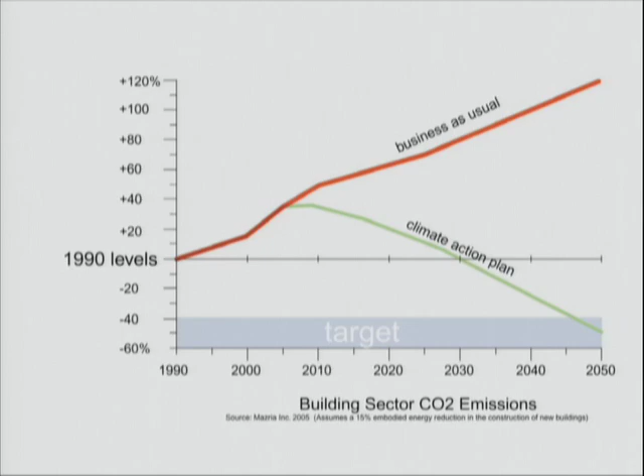So, the good news again: buildings actually use a lot of energy. Even when you account for materials and so forth, it can be up to 50% or more energy than the other sectors—transportation, industry, and so forth. And what this means is there's a big opportunity for us. Buildings are also the solution to a lot of this problem. As the people in the building industry here, we have that opportunity to really engage in that.

So the way that we would suggest you doing this is through the creative aspects of design. We have to look at what is handed to us climatically and as other patterns, and how can we actually engage buildings to do that? Look at what's going on around us—what are our solar resources, our wind resources, the different bioclimatic design things? Use those as ways of thinking about design, and then integrate it so that we can reduce our overall environmental footprint.

That's what we're here to show you today: a bunch of small tools that can help you do that. We believe these are things that happen early in the design process, to the degree that we can start out right up front getting a good orientation for your building, getting good shading, understanding the carbon implications, doing good daylighting—all of those big ticket items, we can go ahead and actually make them less of a problem. We can basically reduce the scope of the issue and get to where we want to get to.

So Vikram will talk about Chaya, which is a shading tool. Josh will talk about daylighting. I'll talk about Greenfoot, which is an ecological footprint tool. And Peter will talk about the design, the energy design plugin as well.

What we need to do is drive that down. If we get to this first box, that's kind of typical code, 90.1-1999, that's about 53 kBTU per square foot. If we go further, we get to the CBECS average, and that's the 50% goal we need to get to now. So that's where you should start today.

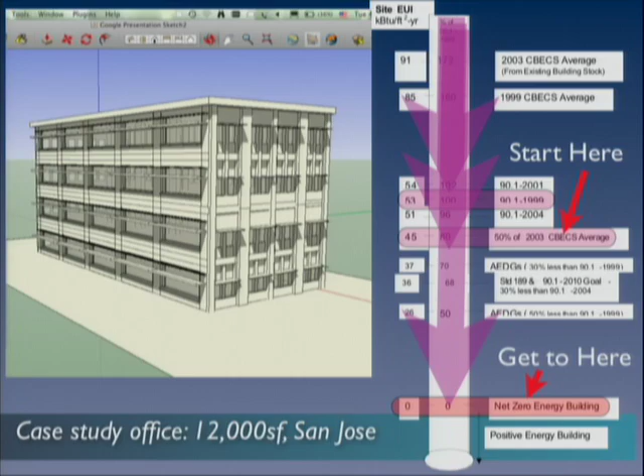But what we really want to do is drive it down even further, if we can, to get to these net zero carbon buildings, or maybe even further into energy positive buildings. There are certainly many examples of buildings that have been done today that either totally reduce their carbon footprint or actually produce more energy than they consume. Those of you who are architects with the AIA have perhaps looked at the top 10 green buildings done every year, and several have produced more energy than they consume.

This is not, again, rocket science. I'd rather be doing that than trying to get my kids off to school in the morning.

So there's a pretty easy way to go about this. Again, we're not trying to diminish the significance of this, because otherwise everybody would be doing it already. But the straightaway way to do it is to reduce the scope of the problem, basically through design. And that's where SketchUp comes in, because we can make design iterations early and understand things like daylighting, efficient mechanical systems, efficient fixtures, and issues relating to orientation and insulation, to basically reduce how much energy your building is going to need.

You need to do an appropriate analysis to see what specific issues might be most important for your building. Sometimes it's lighting, sometimes it's ventilation. Different buildings in different locations have different energy use patterns. But basically, just through design, we feel you can usually get to that 50% mark pretty quickly.

The second place to go is to add renewable energy technologies, different kinds of low-carbon sources of energy, PV, as we have here, solar hot water, et cetera. These are different ways of providing energy to make up and displace all that energy currently being generated by coal-burning power plants and so forth.

We see that this is done cost-effectively. Usually we can reduce capital costs right up front by just designing the building well to begin with.

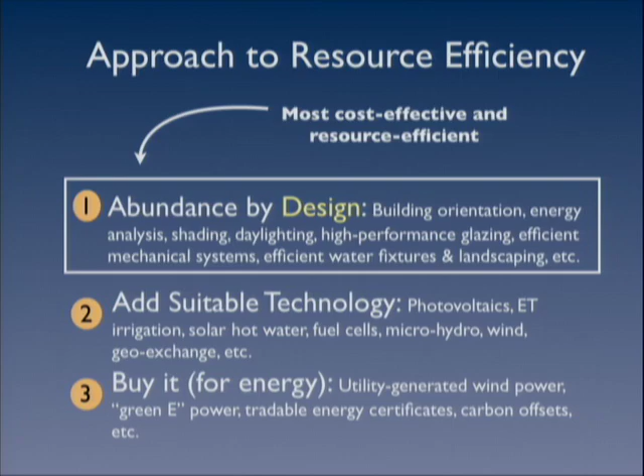So with that, I'll turn it over to Vikram, who will talk a little bit about this tool.

Okay, I'll just speak from here. So Chaya is the name of the tool, for those of you wondering why I chose this random name. It's actually derived from Indian mythology. Chaya was the mistress of the sun, the goddess of shadow, and this started off as a shading tool, so that's where it comes from.

The premise is that generally the way we interact as architects with engineers is linear. We design a building, hand it over to them, they design the systems, and by the time it comes back, all the good decisions have already been made. So the idea is to get in early and have meaningful conversations back and forth.

And the question is normally one of efficiency: how many SEERs can I get out of my system? The real question we should be asking is, how often can I shut my systems off? Can I make my buildings drive less, for instance? Design teams are generally very passive about the passive approach. They really don't want to design a building that operates without systems, because God forbid we can't turn the thermostat up or down by 1 degree.

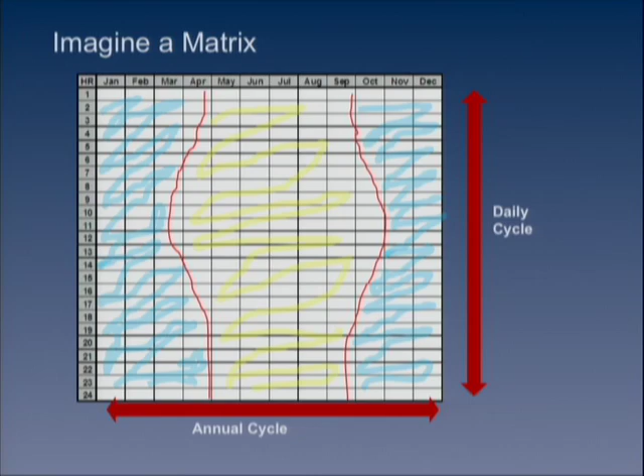So the question is, how do you define the overheated period? The factors that affect the building thermodynamics are radiation, plug loads, lights, people, all of that stuff.

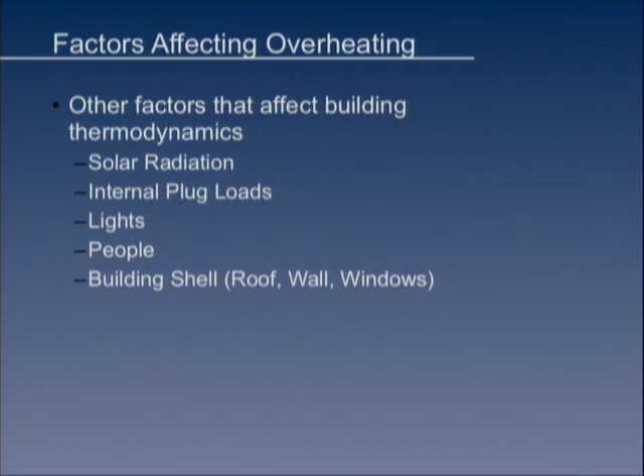Balance point temperature kind of represents all of these factors together. For those of you who are not familiar with these aspects, I apologize, we don't have time, but there is a paper on my website that you can download that explains these factors.

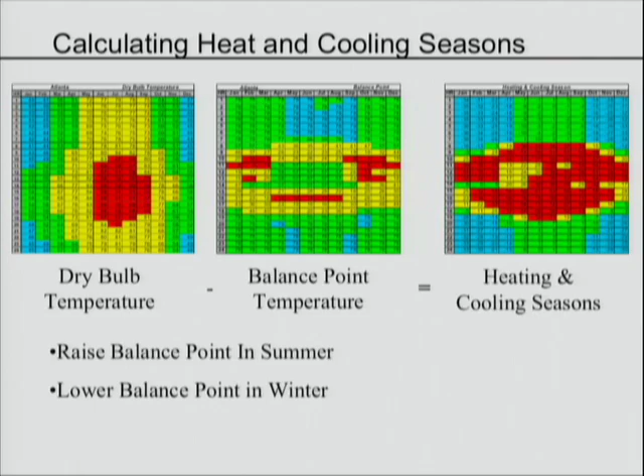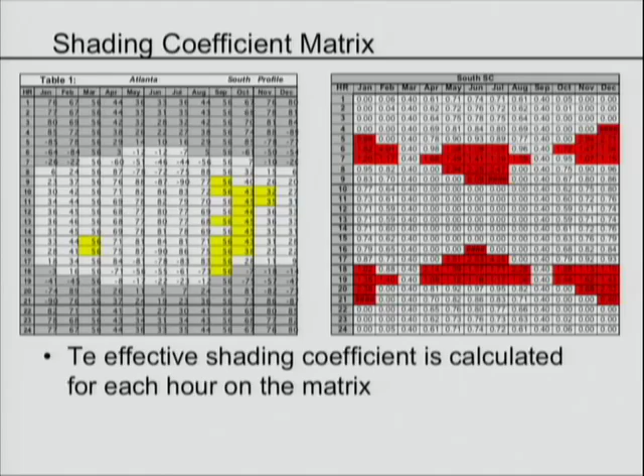This actually comes up with a shading coefficient matrix as well that calculates your shades. What I'll do right now is go over to the demonstration. Right now it's Microsoft Excel based, and I'm hoping one of you Ruby scripters wants to collaborate with us, because it would be really cool to have it in Ruby script.

Essentially what this does is you've got these sections of your west window, south window, and stuff like that. You can see over here it's starting to overheat in this period of the year, kind of towards the afternoon, towards the late end of the day. So you can see the minute I start to add window shades, how that period disappears.

This gives you instantaneous feedback. It's actually calculating real time what your building is doing, what those shades do. This graph over here actually calculates tonnage on your HVAC equipment from your windows, so you can see real time what adding shades does to your HVAC loads as well.

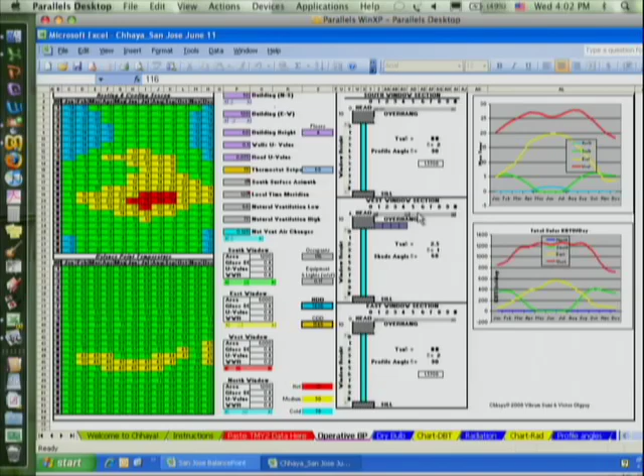The other thing it allows you to do is, right now this is based in San Jose, so it's relatively mild. But right now the building is elongated facing east and west. So if I rotate the building, it gives you the difference - by a simple rotation, you actually move that red period towards the winter months, and you can track real time what's happening.

The other thing it allows you to do is change your window sizes and stuff like that. I probably have to sign off now, but essentially you can download this on the website - at the end we give the web address - and play around with it. I'd love to get feedback. Thanks.

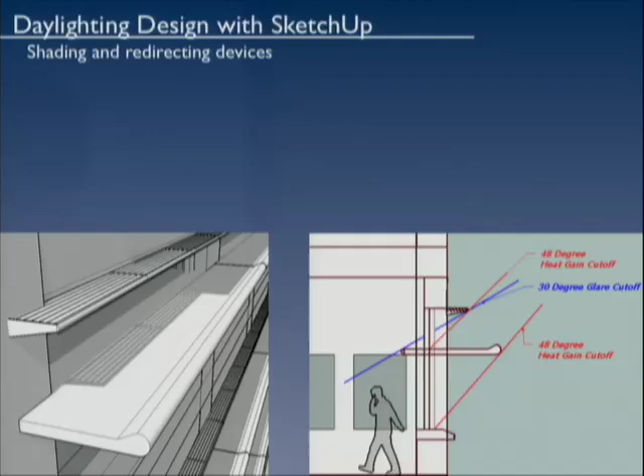So to go a little bit further into why have good daylighting: first off, it prevents glare for occupants inside the space. It reduces heat gain, reduces the cooling load, and reduces the time needed for electrical lights. So you can have really nice lighting in the space, and with daylighting you have light that fluctuates, so it's actually more comfortable for occupants, and they can see their work a little bit better.

This is that building that Victor had shown earlier, that typical commercial building oriented correctly east and west. This would be like a pretty typical overhang that has both a glare cutoff angle and a heat gain cutoff angle, and the Chhaya is outputting the heat gain cutoff angle.

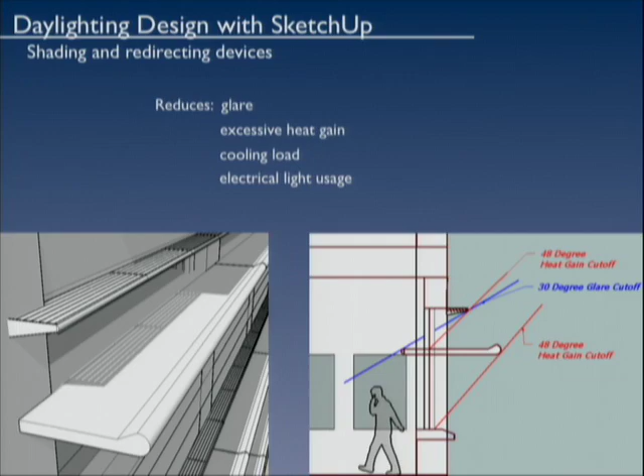What SketchUp is awesome about is that it really helps us understand where there are glare issues and how often glare is going to come into the building, so you can size interior light shelves and other things to prevent glare.

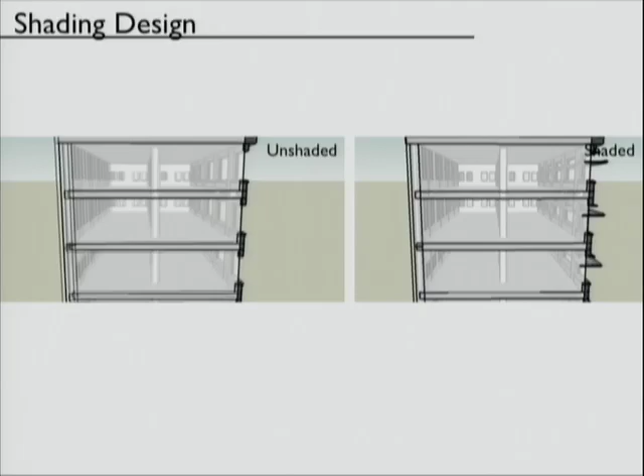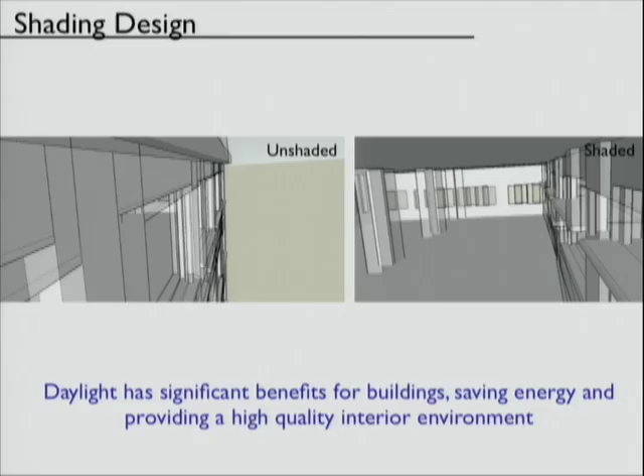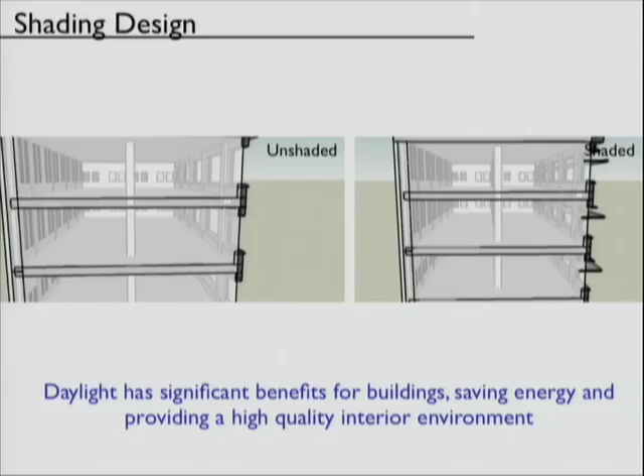So there's the base case on the left and the shaded one on the right. In a bit it will show that without shading, there's going to be glare throughout the day from the east and the south. With the proper shading on the right side, there's less glare from the east, and now the sun is just hitting the exterior light shelf and also the interior light shelf to start bouncing the light. But SketchUp doesn't do a very good job of showing that extra bounce and how the space is actually going to feel.

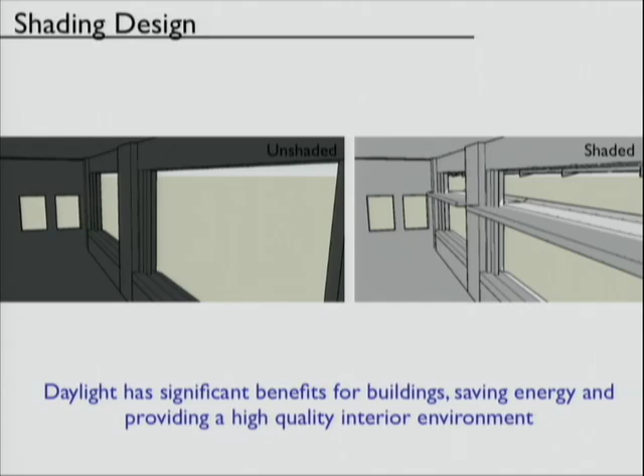So this is when we start to go deeper into AGI 32, which is a 3D modeling tool that we can import SketchUp models directly into. We take a simple SketchUp model, and usually we'll just deal with one floor, and it can give us quick renderings of what the light is actually doing to the space.

In this case, now that we have good lighting, you can see that there's balanced light levels. The light is starting to bounce off of the light shelves onto the ceiling, so you can start to understand where there might be dark spots and other things happening within the space.

Then we can take that model and get some outputs from AGI 32 and see what's going on, and see whether the light is actually satisfactory.

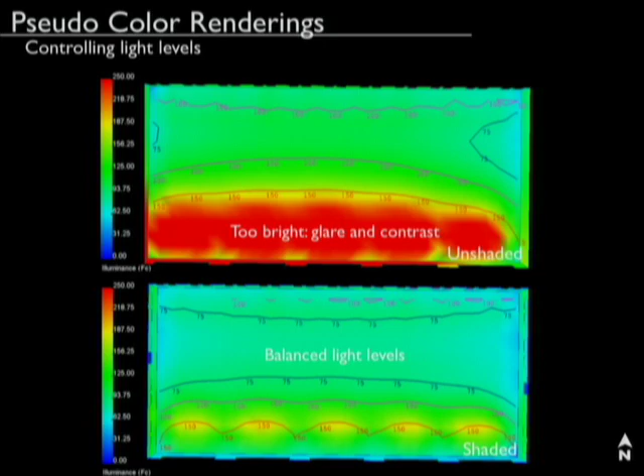It graphs it in a sort of false color rendering, so you can see foot candle levels and contrast. On the top one, where it's unshaded, we have these bright spots, and once you actually go in and see the rendering, you'll understand that it feels really dark even though you have lots of light. On the bottom, it's much more even, balanced light levels, and you can actually have lower light levels but it feels comfortable.

After we understand the light levels, now we know there's enough light in the space. So we want to go a step further and ask, what will this do? Why is this beneficial? Well, we want to end up trying to turn off the lights as much as possible. It'll save us money, there's pollution avoided, and energy reduction.

So what we can do is plug it into this tool called Spot. You can do a generic layout of the electrical lighting fixtures, and it will determine how often these lights will be turned on throughout the year. It really looks at how much daylight is getting into the building, and says the middle spaces' fixtures are going to be on maybe 50% of the time, and the ones in the front are not going to be on when there is daylight availability.

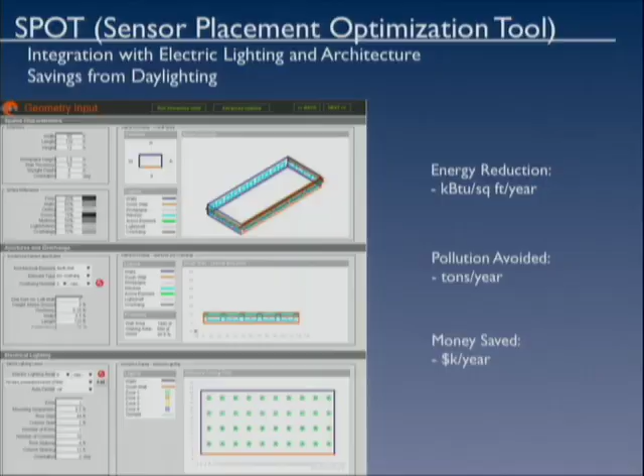What this does is give us an output of each day and how often the lights are turned on in that space. So for a space that's really well shaded with thin floor plates so we can get bilateral illumination, you can see that it's really taking advantage of all the daylit hours, and the lights are only on about 11% of the time.

And what it does is you can plug in this program when the occupants are going to be occupying the space, so it's probably like 15% because there are hours of the day when the lights have to be on when there's not daylight.

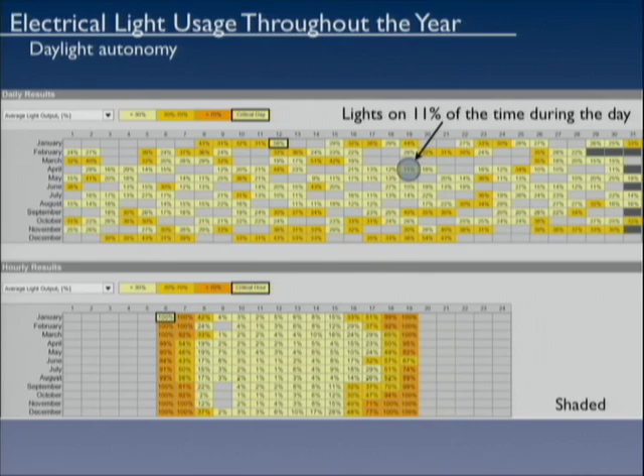In conclusion, I just wanted to reiterate that we're trying to get to the point where we can really show how we can actually start to turn off the electric lights and reduce the cooling load, and really understand the heat gain implications of the building. All three of these tools can really be integrated, and SketchUp is a really important aspect of daylight design.

Josh ends up doing a lot of our daylight modeling at RMI, so he knows these things inside out. We're going to talk about one last small program, a spreadsheet which we produced, called Green Footstep.

This is a tool to basically do environmental footprinting of your building. So we can measure different metrics, water use, et cetera, and see how your building kind of adds up. For those of you who aren't familiar with the concept of an ecological footprint, it basically says that we have lots of different end uses for different kinds of needs.

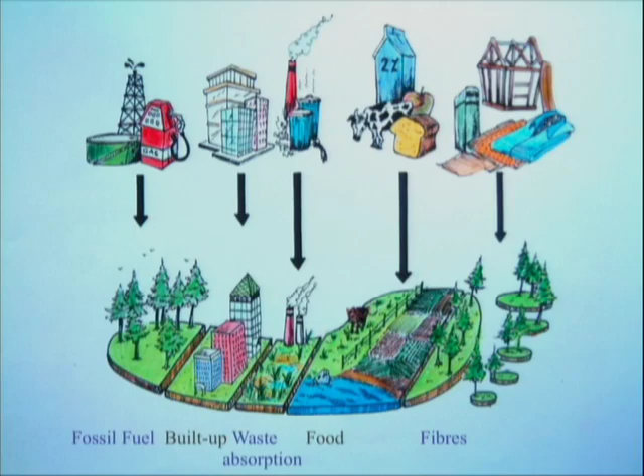What we've done is taken that and adapted it to buildings, where we look at the main building impacts, water and energy and CO2 and so forth, and associate that with the productivity of land, water, and ability to assimilate. We've put this into a simple little spreadsheet. So let me give you a quick demo of that.

Let's see. And this, of course, will crash as well. Okay.

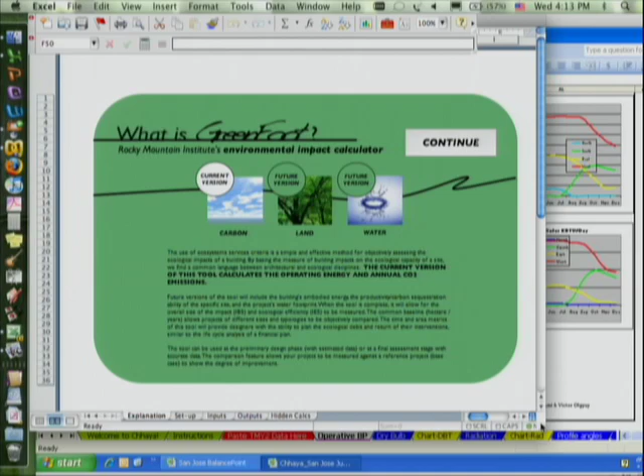So we have a couple versions of this, but this is again a very simple set of spreadsheets that show, in this case, the CO2 impacts. When you take this, you can click through it and say, has your building's energy use been modeled? Or you can use the CBECS data I referred to earlier, kind of standard Energy Star type building data. So you can either enter that or use CBECS data.

Does the building have on-site energy production? Do you have wind power or PV or something else? You can put that in, or choose there. And the same for where your electricity is coming from. You can put in your own blend if you know where all your electricity is coming from, or you can plug in your state, and it'll use an average blend for that state.

So here you put in the basic size of the building, and in this case, since it's the CBECS data set, you could say you're using an outpatient facility or, in this case, an office building. Different kinds of uses in the building would be there, and you plug in what you think your savings might be, 50% or whatever you'd like it to be.

If you model the building, you'd plug in that data. Or if it's a goal, if you decide my goal is to make it 50% better, you'd plug that in. So you can either use a different energy model, get the data through something else, or use it as a goal-setting device.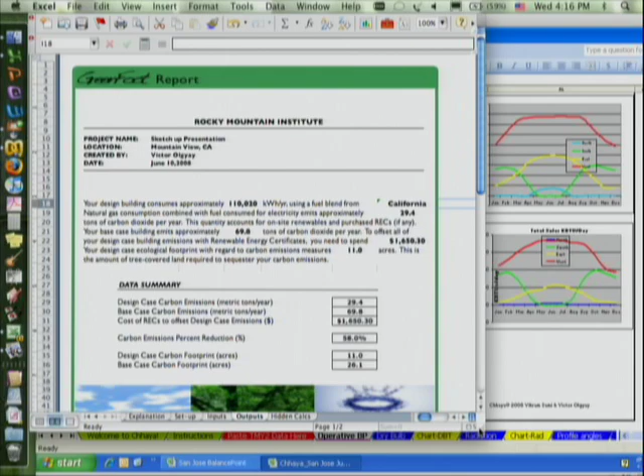Or you could turn it into how much you would need to spend on renewable energy certificates or some kind of offsets if you'd rather do something like that. So that's kind of what it does. It's a real quick, simple spreadsheet that gives you an idea of how much impact your building is having on the environment. We also have an expanded version that goes into water in great detail and energy production as well as other things.

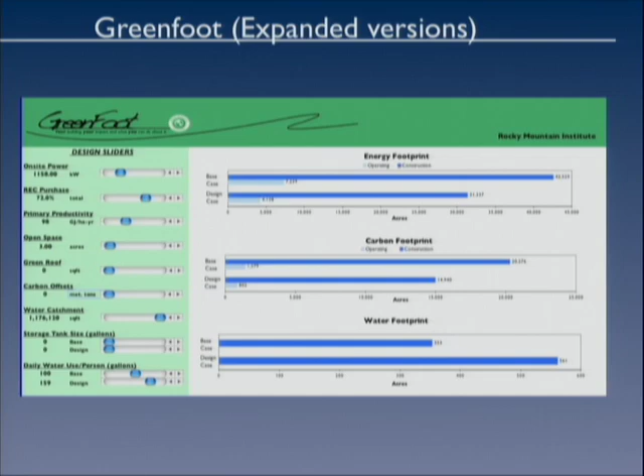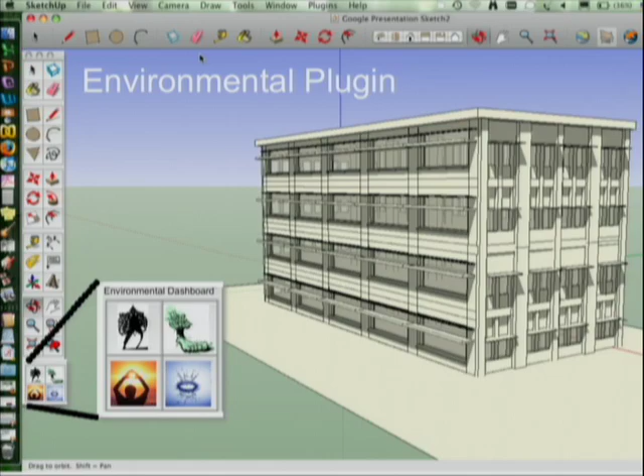Just one more thing about that: we put it together with these different design sliders. So again, like the tool Vikram showed with these little slider bars, a lot of this is that push-pull SketchUp idea of iteration. It should be a dashboard you can jump right into and use at a preliminary design stage to say, we think this is a good way of working. This is where we're hoping to go with this, to produce some plugins that have the Greenfoot, lighting, water, or the Chaya shading analysis as part of that, so we can more seamlessly integrate this with the iterative design process, which is such a great part of SketchUp and why we think it's so powerful to get this stuff done early.

So a lot of these things are available as mentioned. There's a website up for Chaya and for Greenfoot, and Spot is also available for free. AGI does cost money, but that's available too and a pretty powerful tool.

In conclusion, this is really an opportunity. For those of us in the design professions, we have a responsibility to get engaged in this, and I'd encourage all of you to make carbon reduction goals serious goals for your company. We've recently adopted the 2030 protocol to say that we're not going to design any buildings or work with clients that don't step up to the plate and say 50% carbon reduction is the base. We can do better than that, but at least get to that point. Some buildings are easier than others—office buildings are easier than perhaps laboratory buildings—but make a stand and take responsibility for what we're doing. Not only does it increase the value of your project, it's great for the planet, it's going to be profitable for you, I guarantee it, and of course it's good for all of us in the larger social sphere. So get at that triple bottom line, go for it.

It's really, I think, the challenge of our lifetime. So thank you, and with that I'll turn it over to Peter.

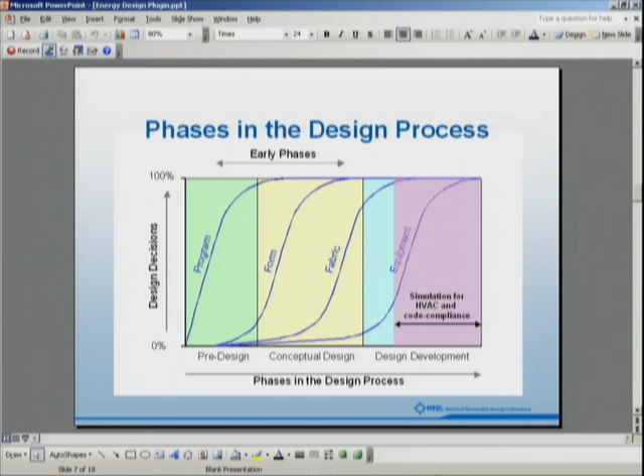So probably many of you know this better than me, but this is how SketchUp, or how I've heard SketchUp is used in the design process. It's often used by architects during the conceptual phase to quickly create a building form and massing, present that design concept to the client, and then maybe based on the client's feedback, iterate on that a couple times until they settle on a final design concept. And then from there, development moves into the CAD stages.

So what we'd like to see with the plugin is that you actually get simulation starting to happen here before the design ever gets to the client.

In version 1.0 of the plugin, which we're not at yet, right now we're at version 0.9.4, which is still a beta. Version 1.0, our main goal is really to make entering the geometry for EnergyPlus easy, which traditionally, in the past, has been pretty difficult with EnergyPlus.

We also will have this ability to automatically create prototype and compliance models based on what you've drawn in SketchUp. And that's going to be a very powerful feature.

It's using a web service that we have, which runs currently right now as the EnergyPlus example file generator. And you can get to that through energyplus.gov as well. It's just a couple of web forms which will automatically create a file for you and then email you the final file and email you the results of that simulation.

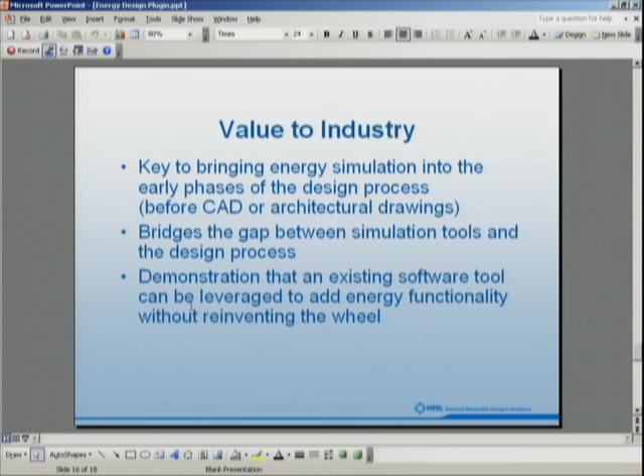It could bridge the gap between simulation tools and the design process, and it's also, for us, a good demonstration that you can leverage an existing software tool to add energy functionality without having to rewrite, reinvent the wheel, write our own 3D geometry interface. And SketchUp does a fantastic job of that for us already. So I think we can get on to the demo part.

Okay, here we are in SketchUp. What you might notice right away is that there's a few toolbars that the plugin adds, and all those toolbar buttons correspond to a special plugin menu. These are all the plugin commands that you get.

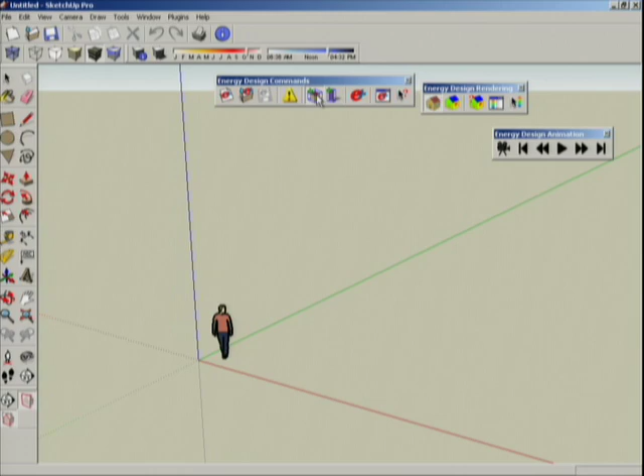So let's say I'm starting off creating a brand new model. I'm going to start just drawing a building. The first thing you need to do is create a zone. You click that, and what I've done is basically just created an empty group in SketchUp.

It's kind of neat to present to you, because usually when I'm presenting, I have to explain SketchUp and all the benefits of it. You guys already know that, so it's a great help for me.

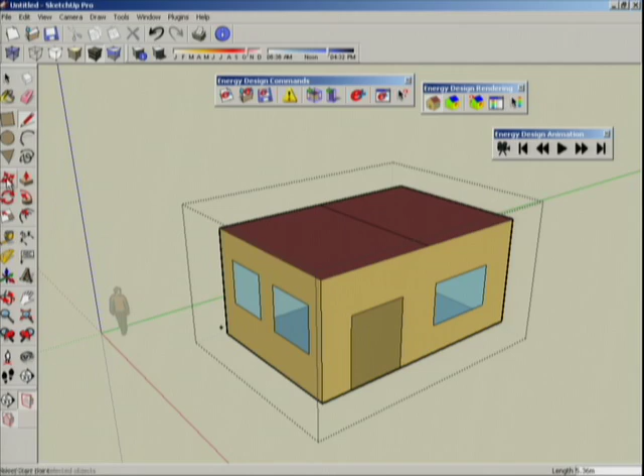So once we get inside the group and start drawing stuff, you'll see that things look a little different than you might be used to when you're usually working just straight with SketchUp. What's going on here is, as you're drawing in this group, the plugin is watching your every move and basically creating Energy Plus objects simultaneously as you're drawing. That's why you see things in different colors than you're used to. And I'm obviously showing off my amazing SketchUp skills.

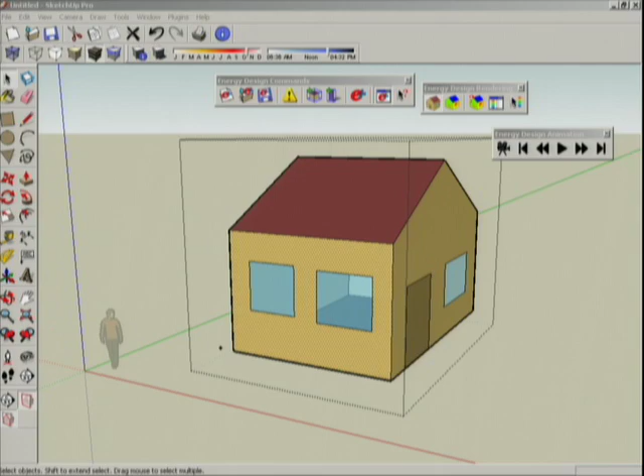So now, just to prove it to you that there's actually Energy Plus stuff behind what you see here, we can go in and start clicking on things and open up this handy guy. This is the object info window, which is going to show up on my other screen here, and I bring it in. I understand you don't want to really know what all this means, but basically each of these, in Energy Plus, it's kind of structured around objects.

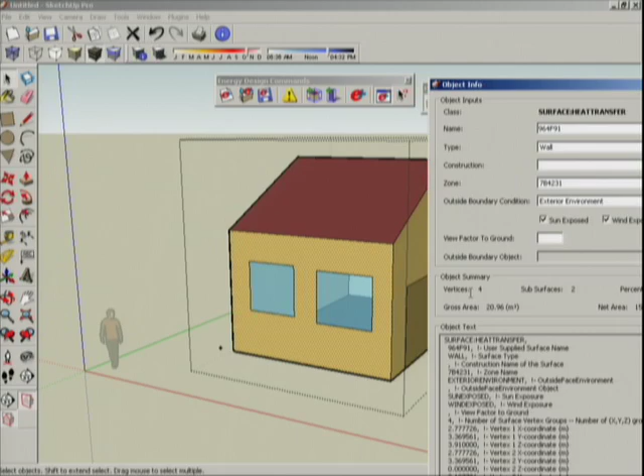So let's say a wall has its own object, a window has its own object. And what you're seeing here is the inputs that go into creating an object for Energy Plus. And this bit down here is the actual text that the plugin has written to the Energy Plus input file. This is the stuff that you used to have to do by hand to describe your building. Imagine putting in all these 3D coordinates manually. You get really good thinking in 3D, but it's a real pain.

So you can switch things, like change the boundary conditions, like say this one has no sun exposure, no wind exposure. You can select the construction. Let's see, it's a heavy exterior wall. And as you make those changes, it's dynamically updating all of the text down here. And you've got a nice little summary in this area of a few handy things to know.

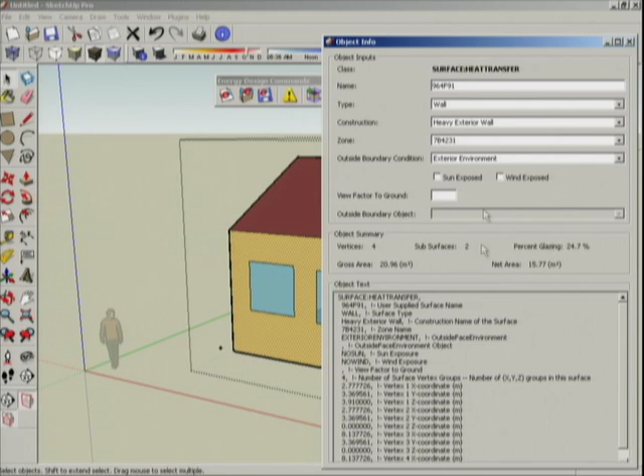So if we click on something else, let's say this window, it's got a slightly different set of inputs that Energy Plus requires, and you can set those here. You can pick things like the shading device, frame and divider. We'll just set the construction. Unfortunately, right now in the plugin, you'd have to have pre-configured your shading devices and frames and dividers and constructions beforehand. So the plugin doesn't handle that yet.

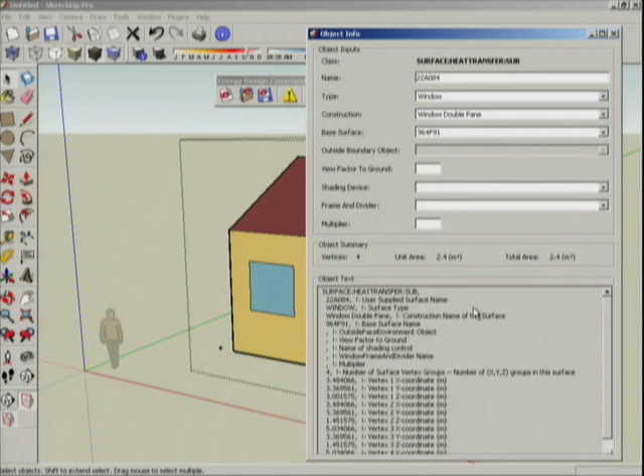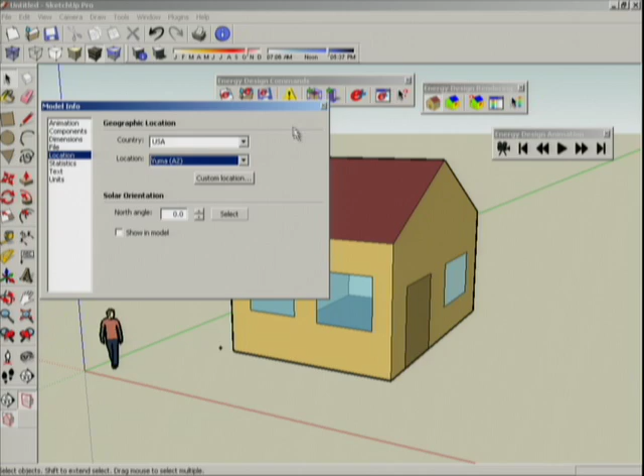Question: does it use SketchUp's location system? The answer is yes. It's synced with the simulation info. You see here, it's got the latitude, longitude, time zone, elevation. If you went in and changed that through model info, I'm not sure it's going to do it dynamically. If you change it here, then it updates. And it works two ways, so if you changed anything here, it's going to update the location. For other countries? Yeah, I think so. It's just doing latitude and longitude. The only thing it can't do right now is the elevation, because SketchUp just doesn't carry that information right now.

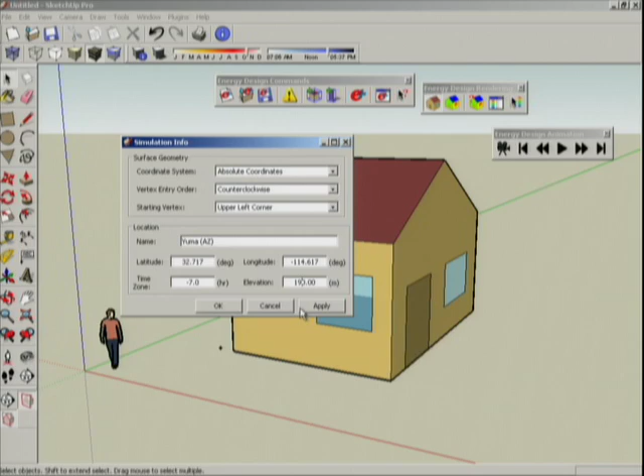Question: Do you model other buildings that are adjacent to it for some shading? Yeah, you can do that. So this was a zone group. To do shading, you'd create a shading group. And it's pretty similar.

It's got a different color. And now those are all created as shading surfaces.

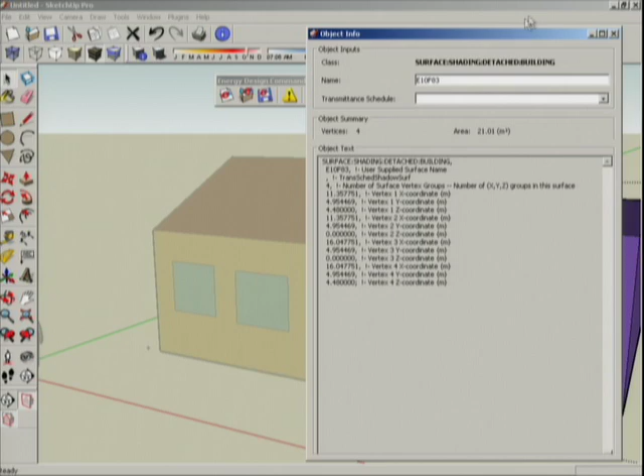If you're designing inside an existing cityscape that's already modeled in SketchUp, can you use that, or do you have to put all those buildings into the group for shading? What you would do is basically trace over them. You can have them in your SketchUp model, add a group, and it'll still snap to the same points, and you just trace over there. Typically you don't want all that extra detail, so this lets you simplify things.

Let me try to go on farther before we do too many questions here in the middle. Let's see, where was I? So one thing I want to point out is that I've gone to great lengths to make the plugin experience pretty much seamless with the rest of your SketchUp experience. You can just draw as you normally would without selecting too many special tools or doing anything out of the ordinary.

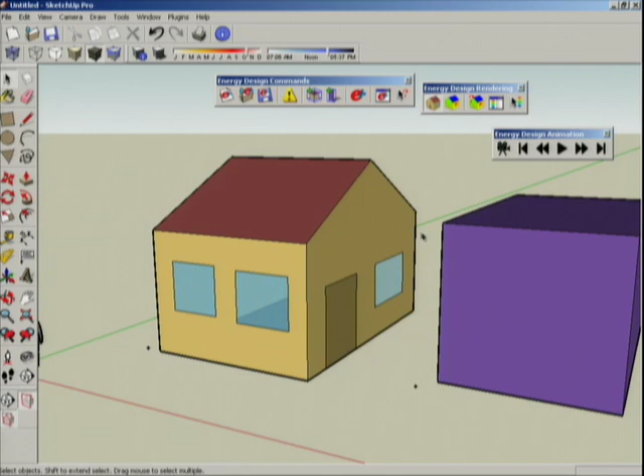Let me close this one. And I want to show you that it can also read in existing Energy Plus input files, and that'll show you some nicer geometry.

The plugin comes with its own examples. Let's see, what's a good one? You can't see it because it's drawing on my screen. So it's reading in the input file, parsing it. Depending how big your file is, it might take a little bit of time.

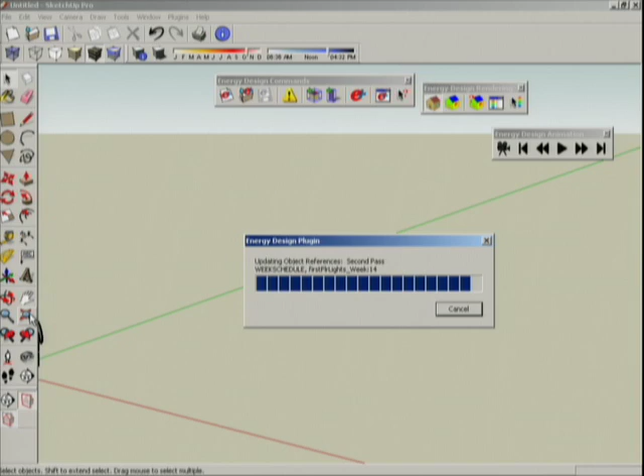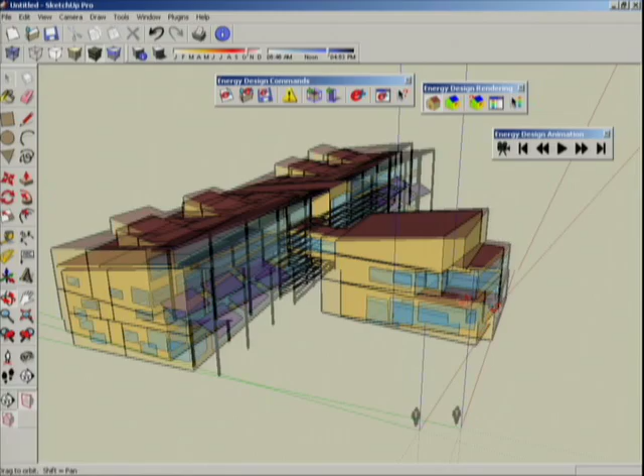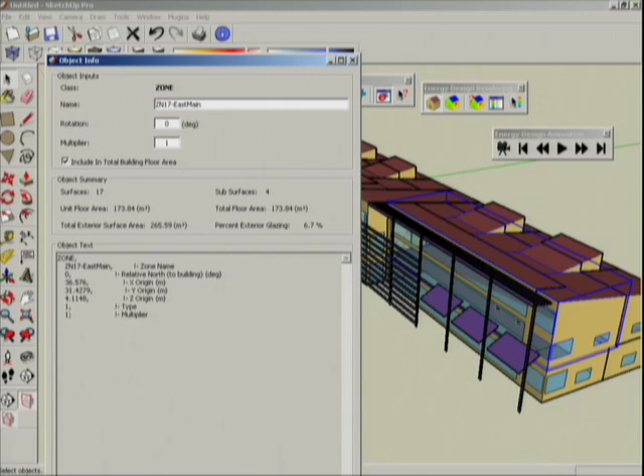Now it's drawing the full model. This was a building we studied, the Chesapeake Bay Foundation building in Maryland. It's got a lot of nice stuff - these are PV panels here, and it's got a lot of shading devices. Just like when I drew the other model, you can select these different objects and see, oh okay, this is that zone, this is that zone, go inside it, and look at the individual surfaces.

So let's close that. This is actually a model that we created using the Energy Plus example file generator. So this is an example of the type of thing you'll be able to automatically create using a set of wizard screens inside the plugin, and then using the web service to communicate to our server to create this file. So it's going to be pretty powerful.

Once you get that file downloaded, it will be basically a complete and fully runnable Energy Plus input file, and at least it's a good starting point a lot of times. So you might automatically create this model and then start playing with it in SketchUp, change the geometry - you could basically do whatever you wanted editing at this point.

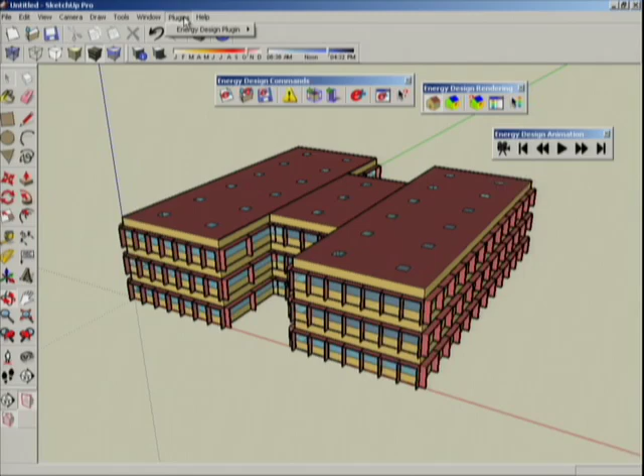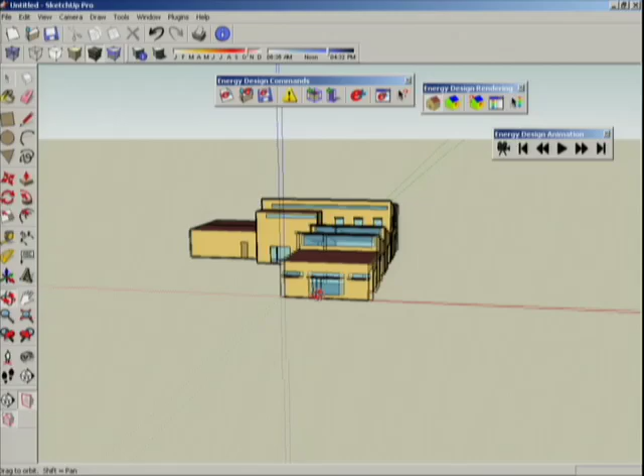Let's see, it's interesting - this one's got a little bug in it, but it's kind of more interesting geometry. This is a real project we're working on, I think that's in Greensburg. Is that... oops.

All right, this is just one of our really simple example files - kind of silly, but I just want to demonstrate how you can run Energy Plus inside SketchUp.

So this is the run dialog. You can browse to select a weather file - here's San Jose, gives you a bunch of information about that weather file. Let's not do an annual simulation, that can take a while - we'll just do a week. And select a couple things.

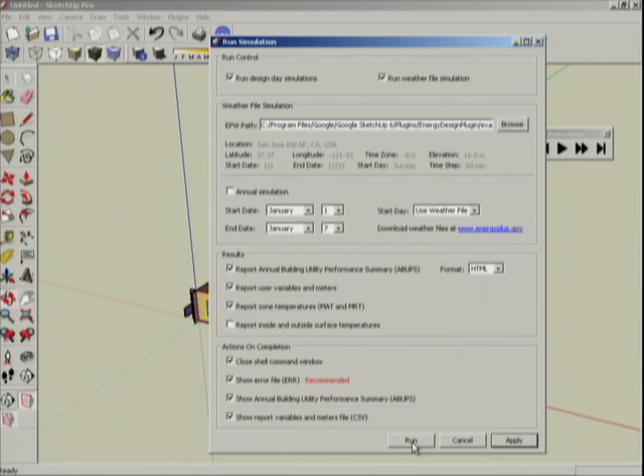These are just options for what kind of output it's going to show you and when it does the run. Now you get to see what Energy Plus actually looks like when it's running - pretty glamorous. And it pops up, here's the error file, so it completed successfully. That's good news.

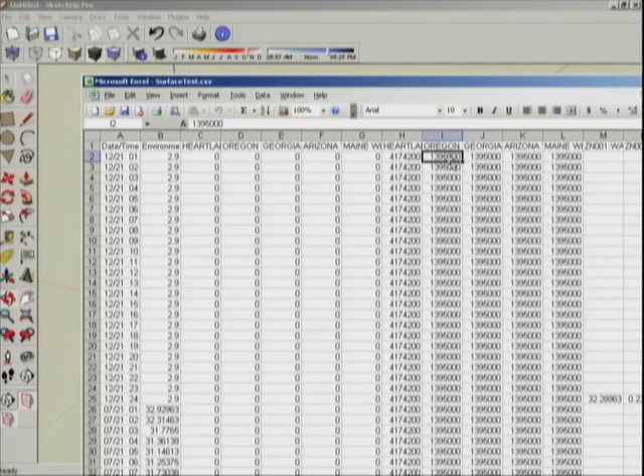Over here on my screen, we've got the Excel spreadsheet popped up. These are the results from that simulation it just did. I don't know what we're just reporting out - OK, here's electric lights, energy consumption. Those are just kind of unimportant variables that happen to be in the file at the time.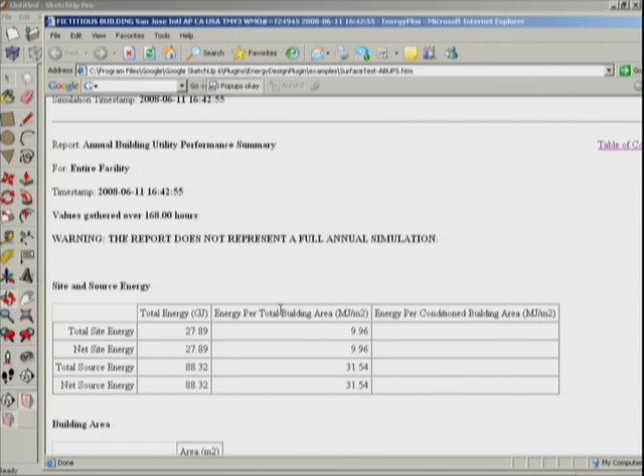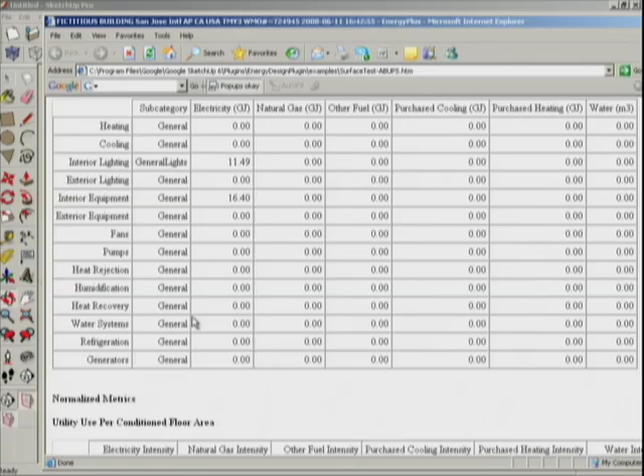You also get this HTML page called the Annual Building Utility Performance Summary, which gives you things like the total energy the building used over that run period, breakdown by end uses and fuel type, and a bunch of other stuff. So those are kind of the standard outputs you get from Energy Plus. Let me close this.

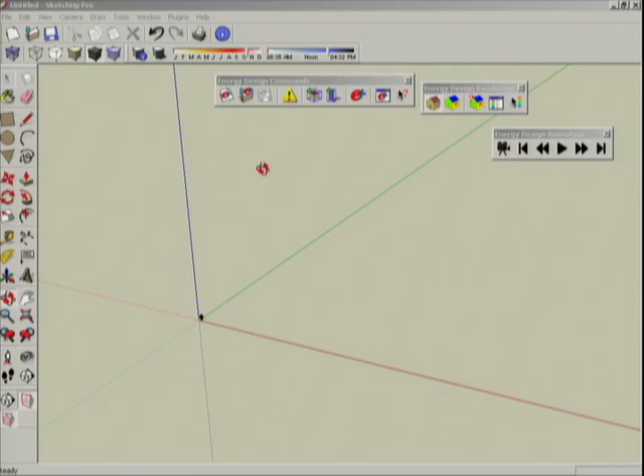All right, this is not a spaceship, it's a building. So one of the neat things you can do with this plugin is actually an undocumented feature right now.

What I've seen as one of the real strengths of SketchUp is the opportunity to do really powerful visualization.

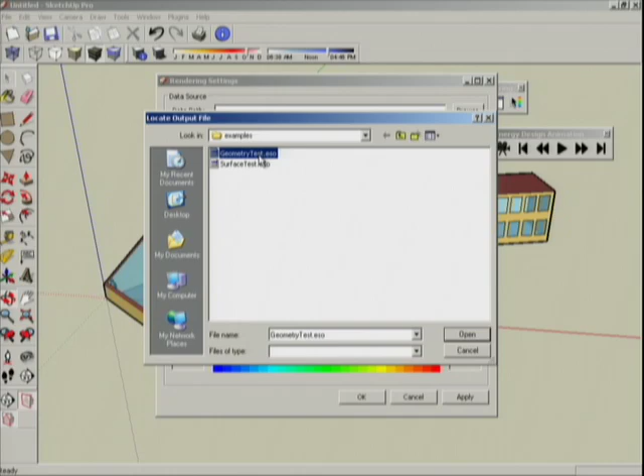After you've run one of these files, you can get the output data in raw form, that's the ESO file, so we just hit open. It takes a little while to parse because it's a big file and I haven't optimized it yet. This takes about a minute, usually the longest minute of my life when I'm presenting it.

The idea is that you read in the output data from what you've just simulated with Energy Plus, and you can map the output variables you've asked for to the surfaces of your model, getting a false color rendering of whatever data you want to see on your surfaces. In this case we're going to look at surface outside temperature, because that's a real intuitive, easy one to look at.

And that's for a single day? It can be for the entire year. It's a point in time, or it will explain itself in a second here.

Yeah, this is a really long minute. I think it must be more than a minute. I'm sorry, what? Is that something?

Yes, we're actually going to have our next release maybe by the end of June. We're hoping to push out these incremental releases every 2 months approximately, with bug fixes and so on, because it is still a beta.

Oh yeah, well, royal we. Yes, what is the schedule for the whole project? You gave me these different incremental stages. What's your goal? It's a little bit hard to say.

I'm a little cagey on it because it is going to be an open source project, so we have to see where the whole development goes, if a development community grows around it, and where they want to take it. In terms of DOE, we only have a certain amount of funding per year, mainly to have me do maintenance on it and maybe add a few small features and keep up with the latest changes in Energy Plus. So we'll have to see how that goes.

I think it's still live. Any other question I can answer? Well, Rudy? Yeah, who was way back there?

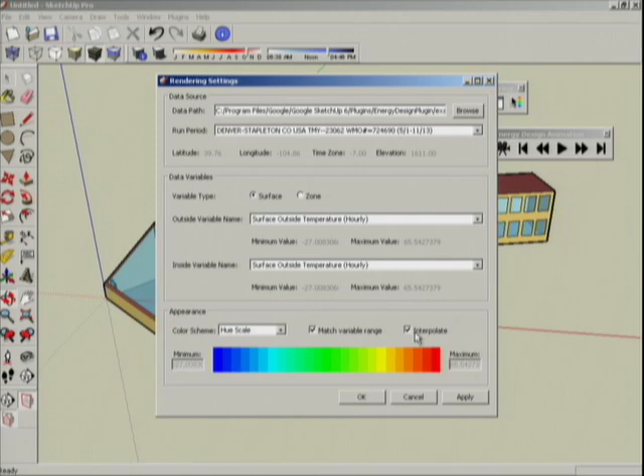So after a long time, it finally parsed that file, and these are the different run periods that happen to be in that file. We had 2 design days, and then 1 run period from May 1st to November 13th, so I'll pick that one. That's fine, turn that on, hit OK. Now the other thing I have to do is flip that switch.

Now you're seeing everything with - let me get a little temperature bar here. It's in Celsius right now, so I know that's not that helpful, but that'll change.

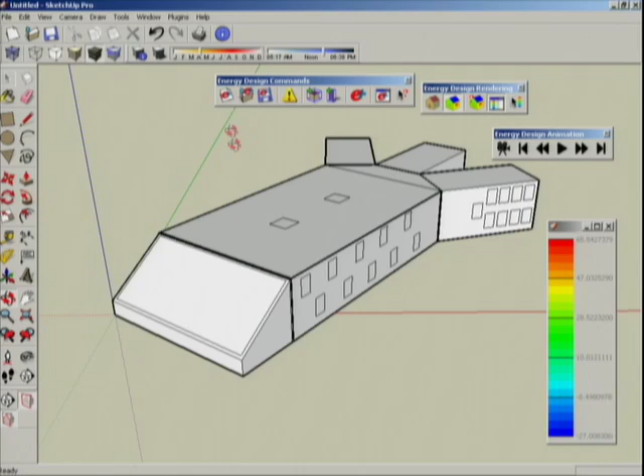So one gentleman was asking earlier, isn't this a single point in time? And yes it is, but you can easily change that using the shading sliders. We can jump around to different times of the year, and if it goes to white, that means you're outside the range of results we have. So we'll stay in here - there's a spot where it's real hot on the roof.

So you can see some pretty interesting stuff here. Now let's take this a step further. You can start animating that. So now it's actually moving.

It's changing the time here. We're in the nighttime actually right now. Let's make it double speed. So it's just sort of doing an animation starting from wherever we were in time, marching forward.

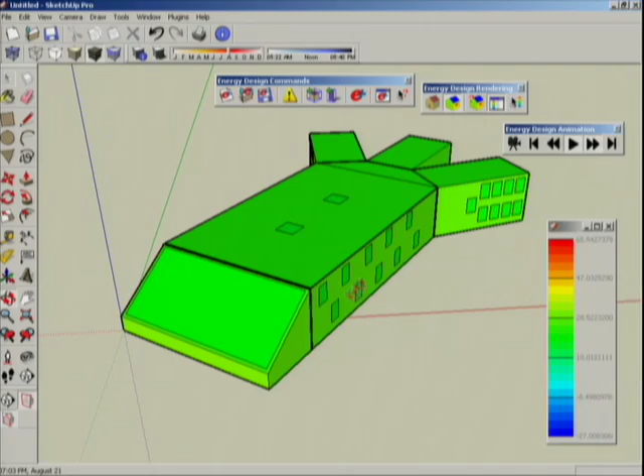Maybe we should go to a more interesting time. So you can often see the effect of the sun rising over here. It'll get warm on this side, then get hot on the roof, and then move over to the other side.

Does it account for shadows created from geometry? Oh yes, that's an option in Energy Plus, and it accounts for self-shading of the building. You can also turn on the shadowing in SketchUp at the same time for kind of a neat effect.

So even if you don't want to use the plugin to do energy simulation yet, the animation of the shadowing part might be fun for some of your projects. I don't know.

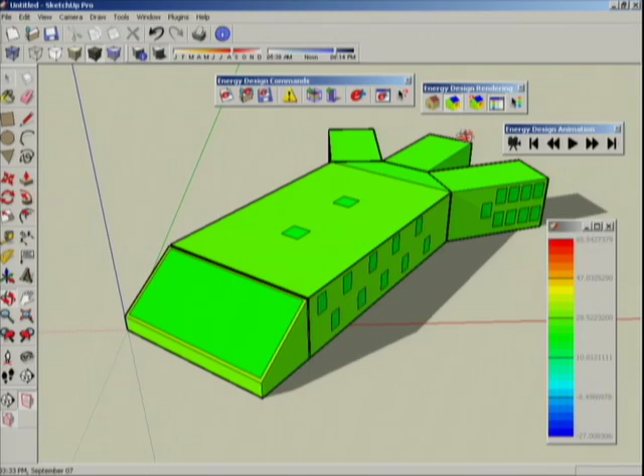Well, you have to do something to justify your fee sometimes. I think I'll cut it off there with the demo, and maybe all of us can answer the rest of your questions in the remaining time.

Yes, sir. You know, one of the exciting things about this in principle is that it's integrated design, that you get to test this stuff. But the way you've explained it right now, it sounds like I got to build two models. I got to build my SketchUp model for design, and I got to build a completely different model to run Energy Plus.

Right. So the question is, don't you have to build two models? It's kind of like integrated design, but you have to build an Energy Plus model and then your sort of architectural model. And the answer is kind of yes and no.

The thought here is that what you draw here in SketchUp, you will ultimately be able to decorate later with SketchUp stuff, so that the two models are the same. The energy stuff would be kind of buried in there, but if you think of one of these windows, I could attach a window component on top of that window and make it look more like a window.

Part of this is to encourage people to start thinking about the energy model at the same time that they're building -- at the same time you're building the architectural model -- and it can still look good for the client.

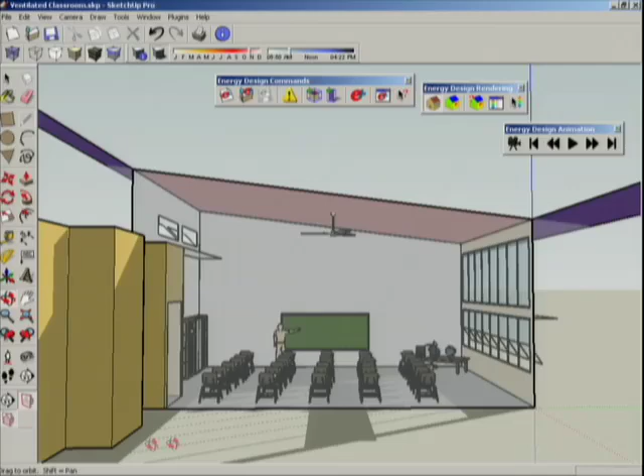So here's just one model I wanted to show. This is developed by one of our guys at NREL who's working on a real project and is kind of a beta tester for us on the plugin as well. He's actually modeling a school building here, and you see he's added a lot of SketchUp components to spice it up and make it look more interesting. But you can see from the colored surfaces that the Energy Plus part of it is still the same.

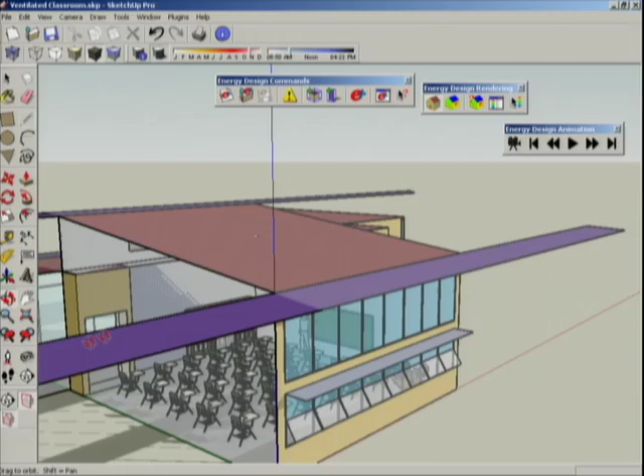Let's zoom out a little bit. I think there's a lot of interesting things people will be able to do with that. Later you'll also be able to actually paint these surfaces so that they have a construction texture. There'll be just one mode to view it in by surface type - another mode will be to view it by the texture. So it'll look a lot better at that point too.

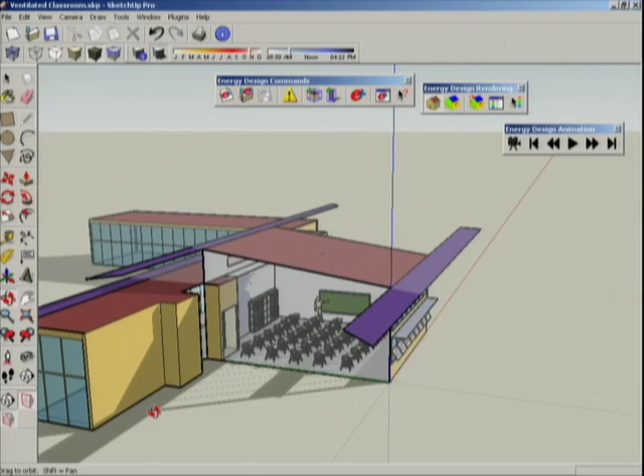The question is, will color have an effect on the energy calcs? It can. The color is often related to the thermal absorptance of that surface, and so black surfaces absorb a lot more heat, while light ones tend to reflect heat. I guess the question was, does the color you're actually putting in the model, does it read that? No, right now the color is just a reflection of what type of surface object it is in Energy Plus.

Yeah, way back there? I'm sorry, could you repeat? Green roof data? We don't currently use that. You can do green roofs in Energy Plus - it has a model for that. I'm not that familiar with it, though.

Next question - are any of these programs developed in conjunction with the idea of what LEED is doing, and some of the movements in design towards standards? Maybe you can show variables that would have to do with LEED things. So the question is, are any of these tools or programs developed with an eye on LEED or standards? For the thing that will automatically create the Energy Plus building models, when it does that, it basically builds a model that meets ASHRAE 90.1, the energy code standard that's common through a lot of the U.S. We don't have anything specifically for LEED right now, but that would be a great opportunity for someone else to step in and start adding those type of capabilities to the plugin.